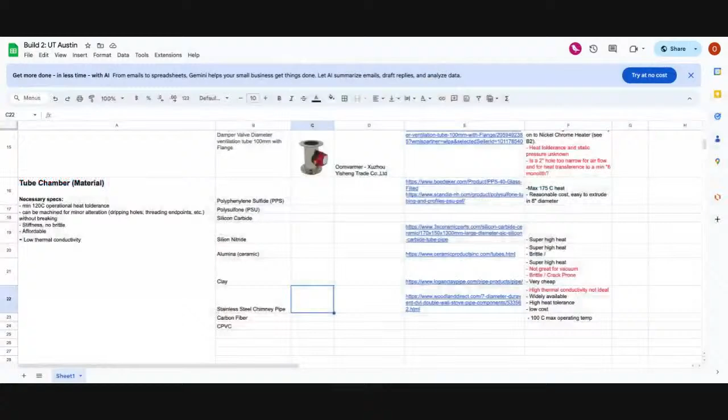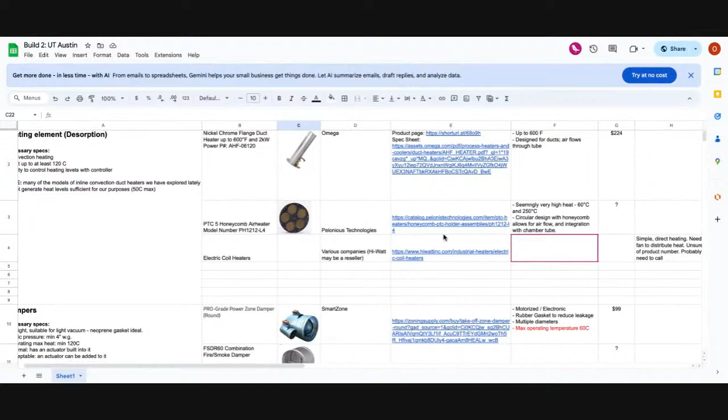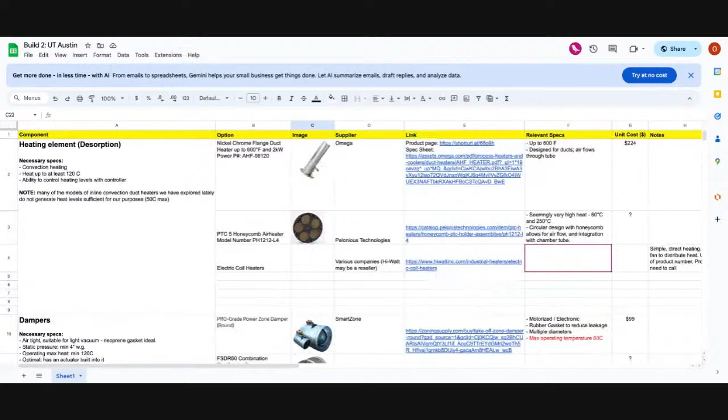So let's just start kind of openly here a little bit. Last week we talked about getting all the different parts we're thinking about at this point onto a common document that we can look at and compare. So I went ahead and did a starter version of that, which I shared with you guys on the Discord. What I attempted to do was list the major components we're looking at, some of the necessary specifications, and then some options that fall under those components, with pictures in there, links, and notes about that product and where it might be good or not. I didn't get everything I wanted up there, but I did get a lot. So was that kind of the type of thing we think will be helpful for us?

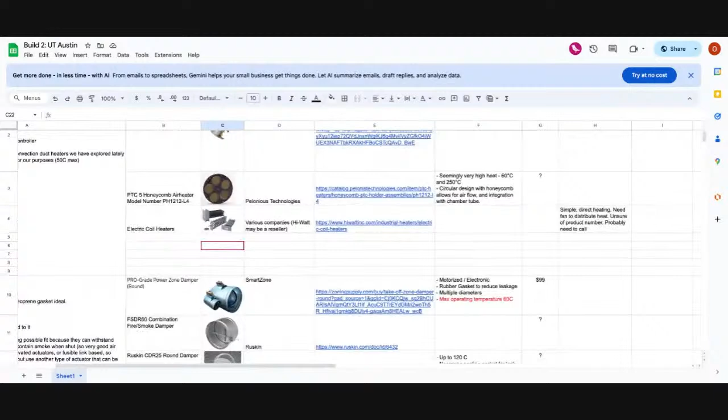Yeah, so we can keep adding to it. I would offer a suggestion of another tab maybe to add—do it on more of a document sheet—and that would be just a sketch of the overall architecture we're thinking about, so people could modify it or make comments on it, so we're all looking at the same picture.

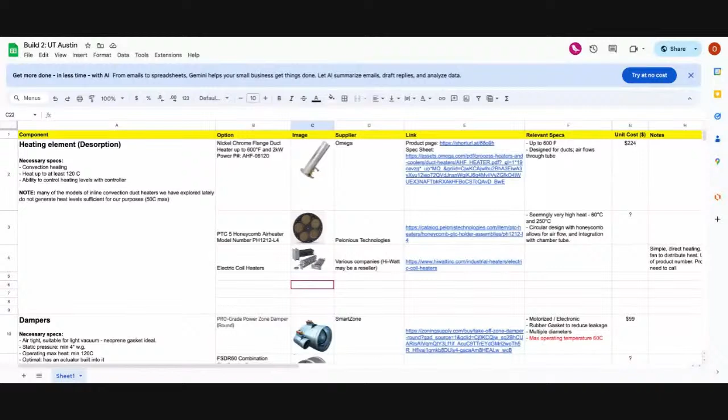Yeah, you had a lot of videos of your ideas. I think it would be good to have them in the list so that if people want to refer to them and draw ideas from them, they're good to have. Yeah, I think that would be great. It's hard sometimes to go back 20 screens or so to find something you remembered seeing. I can take the little Canva slides I make and make those static PNGs or JPEGs or a PDF, and either make it a separate document or insert large images into cells if we wanted to keep it on the same sheet, but I can make a separate document as well.

You can just link them—I think you can make Canva things, or put it in Google Drive. That's a good idea actually, to put it all in Drive, but create a tab here where it labels what the model shows and then just has a link to a file shared on the Drive. I think that's probably a good way to keep it all tidy.

Any brilliant instances of creative thinking or problems or anything like that we want to discuss openly? Then I can share some of the responses I got from some of the parts suppliers related to that list I just showed. But let me know if anybody has anything to discuss first.

Do we lose Seth? Yeah, he'll probably be right back on.

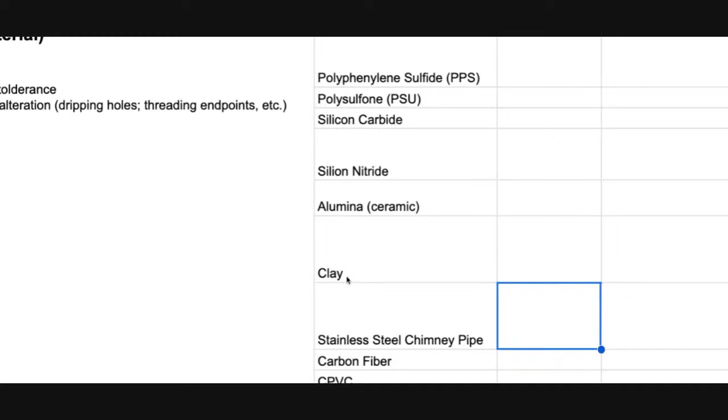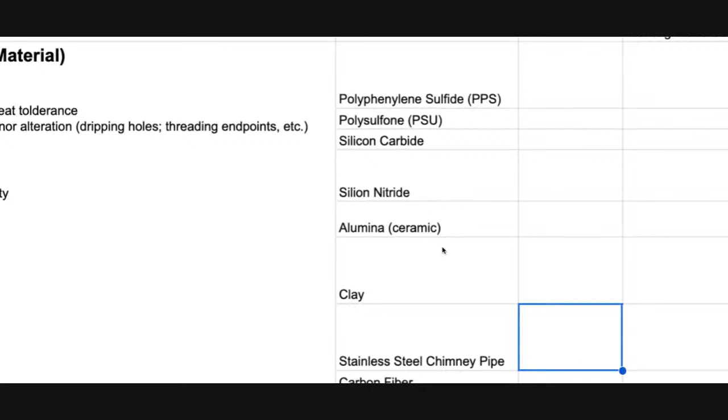All right, cool. Let me go back to this real quick and zoom in to show you the thing I was particularly interested in. I don't know if you guys can see those, but there are a number of different cylinder materials that might fit our needs in terms of dimensions. I did a lot of research online to find out what's off the shelf and what the costs are, and reached out to a lot of suppliers for quotes. So I'll go through what I found.

One that we found really promising, if you remember, was polyphenylene sulfide, or PPS, as well as PSU and polycarbonate. What I'm finding is the pricing on these is absolutely insane. It's not like PVC where you can get whatever you want, and PVC only has like a 60 to 70 C max temp. These specialty polymers are all really expensive. Acrylic would also be awesome, it'd be so cool to have a see-through pipe, but it doesn't have the heat requirements we need.

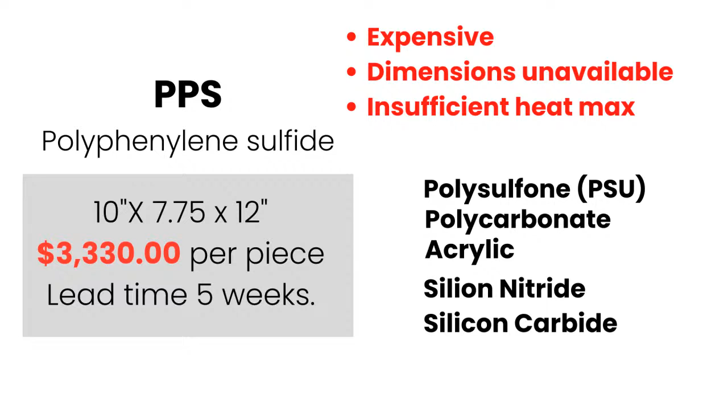I looked into a couple of other ones. Alumina, like a ceramic pipe, seemed like a really interesting idea, but those are also wildly expensive, at least the ones I've looked at, and sometimes you can't even buy them as small as we want. Carbon fiber, the only one I could find off the shelf, is also too small, like an interior diameter of 2 inches or something, and that was really, really expensive.

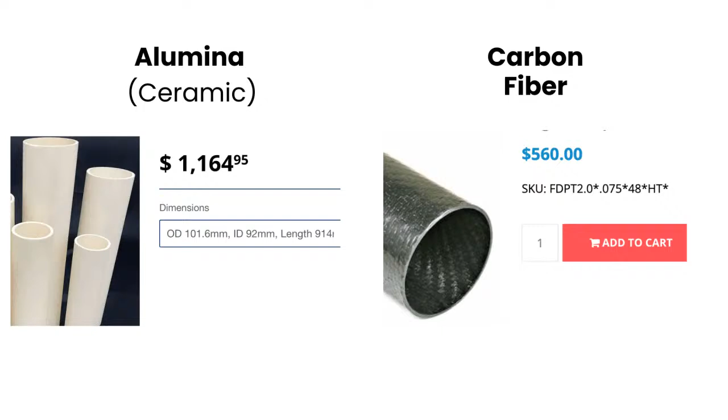But some other options I found could be worth exploring. I talked to these guys today about a vitrified clay option. Those are extremely hard and can be made to order in the dimensions we want for pretty cheap. One company in Ohio could ship us an 8-inch interior diameter, 5-foot length clay pipe for like $300. They also have other things, like the concern is how do we join it up with metal parts since we don't want to drill a hole in a clay pipe. But they have gaskets and connector parts kind of meant for that, so I thought that was an interesting option. Let me pause there. There's one other thing I discovered that I think might be the direction we want to take, but first let me know if you guys have questions about those three things.

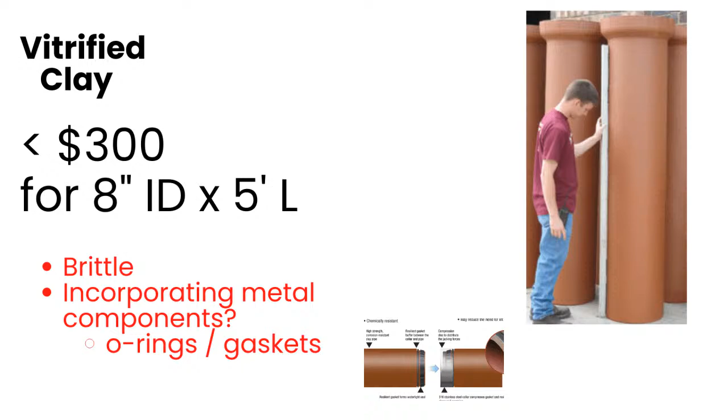I wonder if something like that kind of pipe could be picked up at a plumbing supply store, maybe not that size but smaller pieces. I think it can, it's just about the material. If you go to a plumbing store or a Grainger, they'll have PVC and metal parts, but making sure we can get hot enough without melting it, those seem to be more specialty. But I don't know, we can go take a look. I drove by a Grainger yesterday, I almost went in but had to take my kid home.

I like that clay idea. If you're going to spend $1,000 on plastic, you might as well just use Pyrex.

Yeah, exactly. So what about the metal HVAC tubes, what's wrong with those? This is the thing, one of the fun things about this project is how we go and ransack other fields to find parts. We were really dialed into HVAC from the very beginning, and that made a lot of sense, but if you think of other things, like what else is tubular, air needs to flow through it but it needs to get really hot. A lot of those HVAC parts don't meet our needs, the basic chamber could work, but some other stuff isn't necessarily ideal. If you remember last week, I said I liked the vertical because it's kind of the metaphor of a chimney.

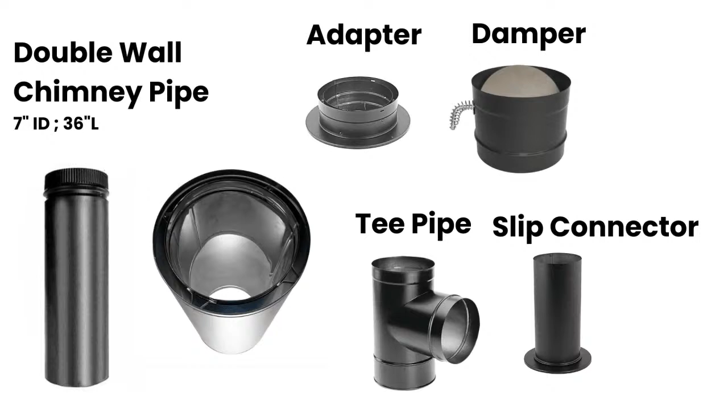And then I got to thinking, what about literally chimneys and stoves? What do those things do? And that was where I found this stuff, which is the thing that's awesome about this. It puts us back into stainless steel territory, which we'll talk about in terms of heat absorption. That was one of the reasons why we didn't like it.

But it has a lot of other things that really recommend it. It's got all kinds of these pipes that fit into these other locking parts that are actually quite useful for us. So for the chimney, if you did a double wall chimney, like a 7-inch or 8-inch diameter, it's got 8-inch, 7-inch, all the way up to 14, 24-inch length, 36, 48. You can do any number you want.

But these double wall ones make it less hot to the touch. And it also possibly opens up the opportunity of inserting something like a ceramic blanket or a silicone layer that would create better thermal properties, not just so it wouldn't be hot to the touch, but you could potentially line the inside to create a barrier between the metal and the monolith itself.

And then it has these T pipes if we wanted a separate pipe so the air could flow through that and didn't have to go through a heating element. It's got this little top hat jobby slip connector that could be like a stand that you could also put the heater in. And then it has these—I talked to them today on the phone.

These dampers can go up to extremely high heats, as you'd expect for a chimney. It doesn't have an actuator, but I looked up a whole bunch of companies that have standalone actuators, like Belimo or whatever it's called, that you could potentially add to the outside of it. So anyway, I thought that was kind of interesting.

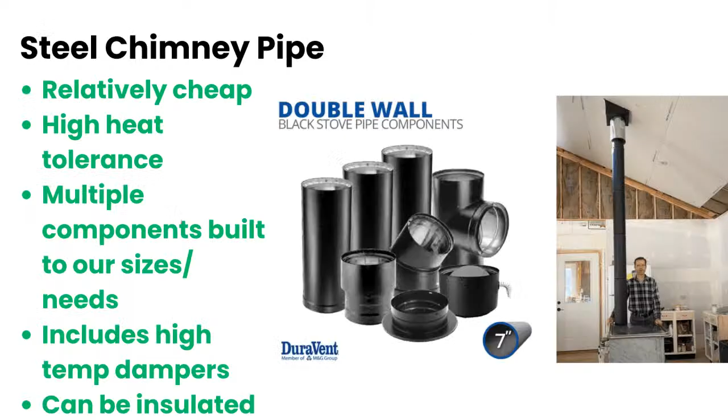And they're relatively affordable, but high temperature, they could potentially be insulated. All kinds of components that are in that 6 to 8-inch diameter that click together, high heat, and all those parts combined would be like $400.

So to clarify, I was never against stainless steel made anything. The problem was trying to insulate the existing thing we have—it's a weird shape with a lot of surface area to insulate. So insulating that is complex and expensive. I'm not against a normal piece of stainless steel, and it does have great thermal properties, but our piece of HVAC piping isn't practical for that reason, and also it can't hold a vacuum.

So stainless steel is fine. Double wall sounds great. And it looks like we don't need much vacuum—the vacuum isn't doing the work of stripping the CO2 from the sorbent, it's really the heat that does that. It's more just evacuating the chamber. So it seems like relatively low pressure would be fine without turning this into like a Titanic submersible.

But anyway, I love the look of this stuff here because it has a lot of parts that we could just kind of hack. So I don't know, that's my latest thinking on it, and it's cheap.

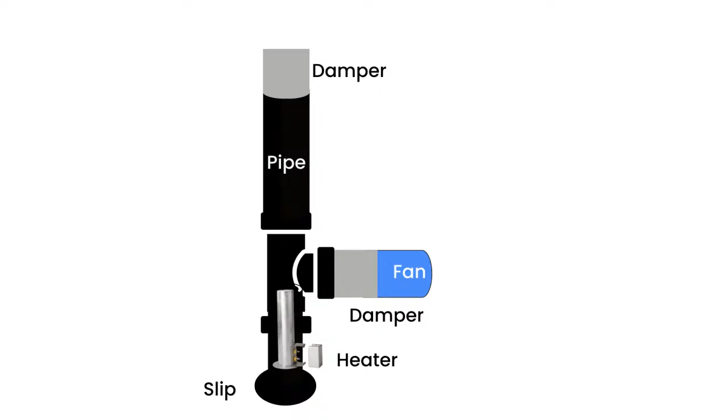So would it be that you'd have the monolith in the middle, but with some gap between the walls, and some head space on top, like David was explaining - an empty space where the heated air would go up, but it would give it some room to keep moving around. Is that kind of what you mean?

It doesn't have to, it can be - it depends on the size of the holes in the monolith. If the holes are bigger, you can just use the monolith as a pathway. If they're really small, then I think we will have trouble with both sides of the airflow.

If the holes were really small, we'd have to rethink how we do that, because then it would be hard to heat. If the holes are really small, we don't want really big gaps on either side, because then the air will just go through the big gaps and never through the monolith - the resistance will be too high through the monolith. We're trying to heat inside the monolith, so depending on how big the holes are, I think we have to go through the monolith.

Yeah, Kirsch gave us a specific recommendation on the holes - it's 100 cells per... it's pretty small.

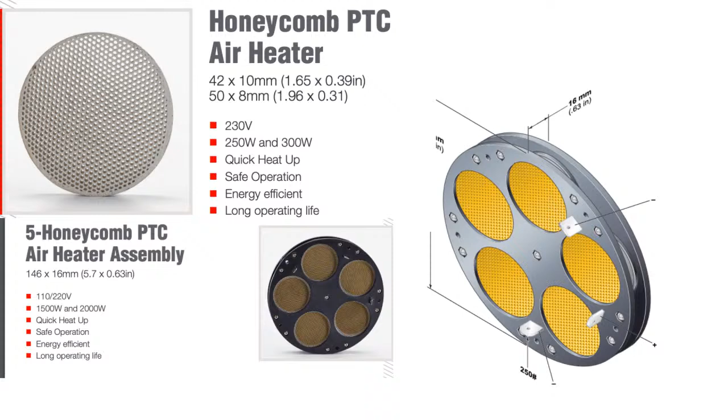And then this was the other thing too - I was hoping the guy's quite interested in our project. This is pretty cool. This thing takes up less space and apparently it's super efficient. It could be 6 or 8 inch diameters. You can just pop it in - it could be the bottom of the tube, you know what I mean? So hopefully by the end of today I get a quote on pricing and other stuff. But that's another option to consider.

Yeah, I like that it's shorter, but I think our struggle will still be the resistance of the monolith. I suspect it's going to be expensive. Yeah, I think it probably will too. So the other one's not that bad - I can't remember what it was, I think I have it on the spreadsheet there. It's like, oh, it's 224 bucks. It's not super cheap, but if we save on other stuff, we might be all right.

Okay, yeah, the monolith pore size is throwing a curveball for me. I'm hung up on how the holes are really small. I gotta think about how to...

With the air though, from the heating perspective, assuming we have some pushed air for that, it's not going to be anything like during the absorption phase. Isn't it just sort of the path of least resistance? If the monolith fits snugly into the pipe, where else is the air going to go if it doesn't move through those cells? You'll probably get partial blockage, and part of the air will go into the channels and go through, and part of it will get blocked by the surface of the monolith and bounce back somewhat. That's probably what's going to happen. So you won't get full airflow on the other side, you won't feel the full airflow. That's what I'm suspecting would happen. These are all just guesses. Do we have to use this monolith, or is it just Kirsch's suggestion?

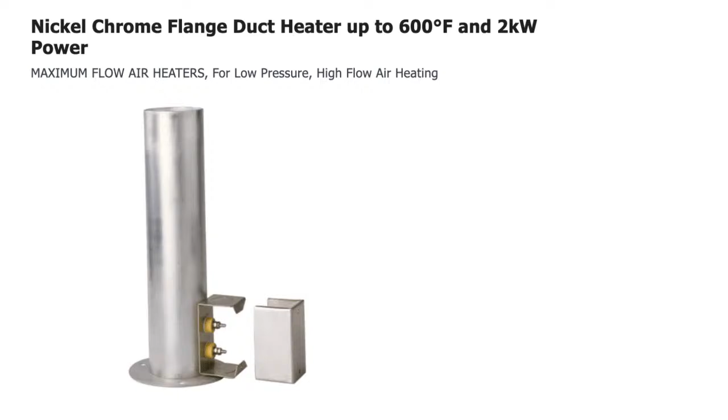Otherwise, it's called a proportional integral derivative, or PID. It's pretty standard in the world of sensing and feedback - that's basically the most common. I don't know if it's the only way to do sensing and feedback, but it's the most common. I don't know what goes on with this wiring system they have here - it's a very simple wire in, wire out type of thing. You can hook up any heater to a PID, and then use it to control when to turn the heater on or off, by having the circuit also communicating with the sensor.

I'm really hung up on the hole size, so I think that would be my bottleneck in my head. I'm not a good person to ask about programming circuits and stuff, but I can think of solutions for mechanical problems.

If you can find a link for that monolith, Chris, then I'll see if there's similar stuff that's maybe slightly easier to work with, or maybe it's fine as is if I see it. Let me throw a few in there. A lot of these are on Alibaba - it's quite a commodity. I find it's hard to find very detailed spec sheets on some of these monoliths, but I'll put a few. There's like a 50 cell per square inch, 100, different sizes - I'll just put the links there and give those a look and let me know what you think.

When I saw you search them on Alibaba, the pore sizes looked quite big, so I was really surprised that we're looking at really tiny ones. But I'm sure we can make something work. It'll be interesting to hear from Kirsch too, about how much of an issue that is for them - he was talking about a low... what did he call it? A low something fraction, where there's not a lot of space in that chamber, so there's not a lot of air moving around, and they're putting forced air through a monolith. That seems to work for them, but we'll need him to explain in more detail why that is.

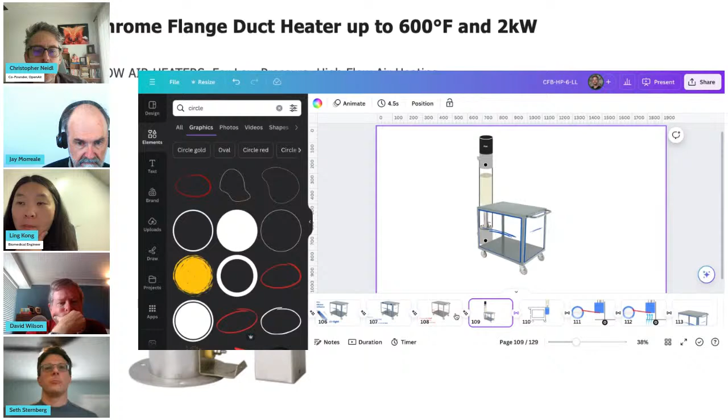Yeah, that's why I was thinking of something like this. I was just playing around with it more from an ID perspective, but let me share that. I was thinking of something that works like this: you have a chimney that could be attached to the unit. And I found this cart, which is a similar price, but has the benefit of perfectly right-angle legs, so you could potentially put a box in there or actually make it into a box, enclosing it with plexi.

And that gives us a nice space on top where, David, all those various balance-of-system parts could be neatly put in a cabinet. Maybe you put the vacuum on top of that. And then that pink button is where you'd put the sensor.

I was looking it up, some of these boxes that are vacuum chambers are pretty simple. It would be interesting if there was a way to drill and put a gasket that would allow the air to go directly into that box. But anyway, very much a stage 2 thing, just looking at how this would all sit together efficiently.

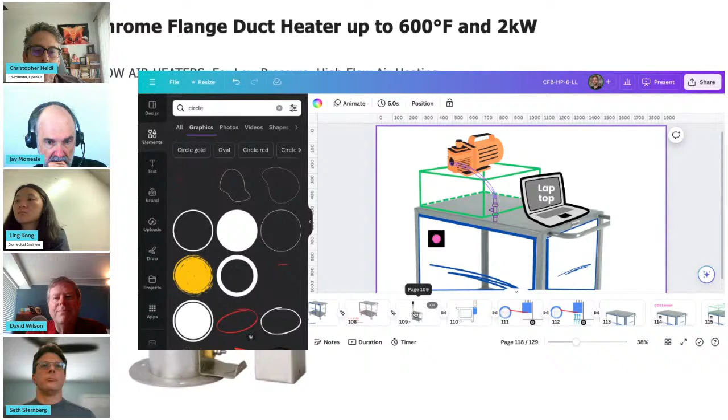All right, well that's good ground covered. We're going to have our Texans with us again. Sorry guys, I'll go back here. Next week we might even just be in the lab for that, so I might go over early and walk around, and we might all be in person together. But we'll be here same time, different day, next Wednesday. So that'd be cool. Yeah, no, I'm dying to go look at it.

What I'd love to have Will do is give us an in-person demo of his testing machinery, how he puts a sorbent in and is able to test the CO2 in, CO2 out. That's extremely useful that they have that at UT. I'll talk to him in the meantime, but maybe we can carve out 10 minutes or so and he can give us a tour of his equipment, which could be fun.

Okay, all right cool. Do you mind if we talk action items for a second? Yeah. You want me to end the stream and we can talk there, or should I keep the stream going? No, there's only one. Yeah, we can keep the stream going, and maybe we add on after we end the stream.

So the to-do list item for you, Chris, is to find links for me for the monoliths, and the to-do list for me is to do some spec reading on them. Okay.

I'm going to make a little tasks tab on that spreadsheet where we can track those there. Yeah, I was going to post it on Discord, but I think it doesn't hurt to have it repeat in multiple places. Yeah, I think that's right.